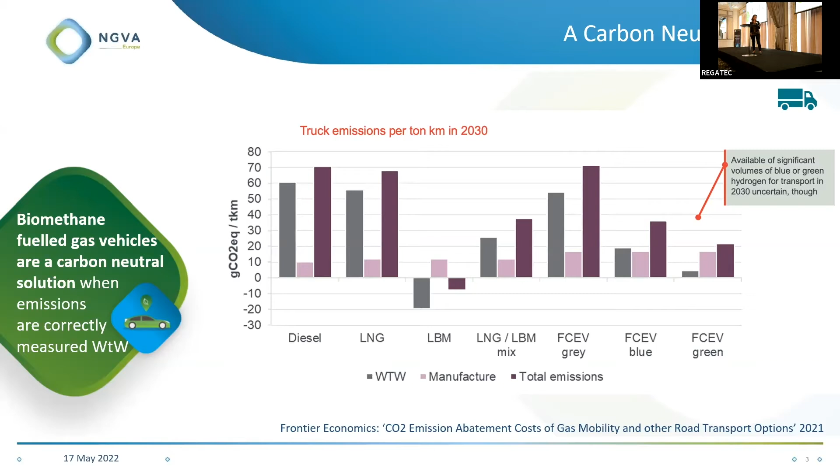And first, I don't need to tell you why we are talking about biomethane mobility. You know that very well. The advantage is clearly that biomethane is a carbon neutral solution for the transport sector. And we know how difficult it is to decarbonize the transport sector. It's a particularly attractive solution, especially for trucks, for heavy duty vehicles that are quite difficult to decarbonize. And even more, biomethane can be carbon negative depending on the feedstock sources. So that's why we're interested in this solution.

And we heard about biomethane availability and scalability today, but looking at the transport sector specifically, what does that mean? This is based on analysis done by NGVA Europe together with the European Biogas Association. And what is interesting is that if we look at 2030, the projection is that 40% of the gas used by gas vehicles, so in the transport sector, will be biomethane. This represents just 117 terawatt hours, which is actually less than 10% of the total EU production capacity.

So it just shows that using biomethane in transport will not use all the biomethane available for the different sectors, but still can make a significant contribution and complement other solutions to decarbonize mobility.

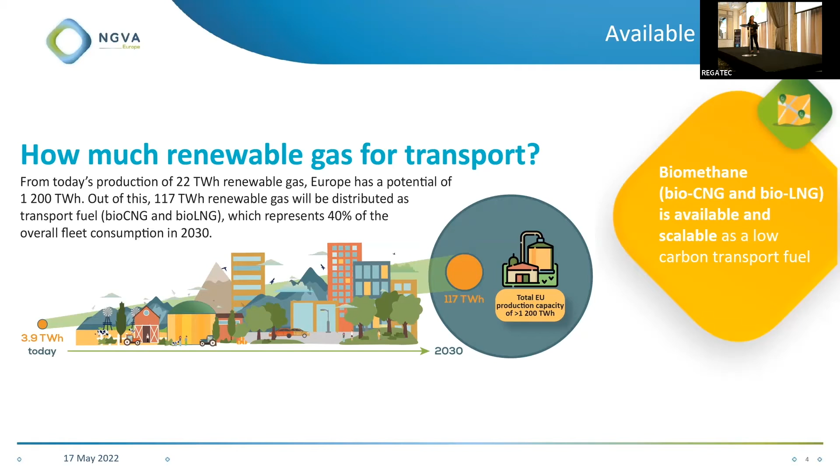What's the situation today with biomethane availability? This shows the share of biomethane at CNG stations in Europe today. And we heard already that Scandinavia is really leading the game on this, with almost 100% biomethane already in Denmark, Sweden, but also the UK and the Netherlands are not far behind. And also some countries at around 60%, Norway, Germany, and quickly increasing. So in Europe overall, that's 25% already, so significant and growing. And we see that there is a lot of potential to grow more.

So of course, domestically produced fuel and domestically produced vehicles also, especially when comparing with battery electric vehicles and a lot of components and materials that come from other places.

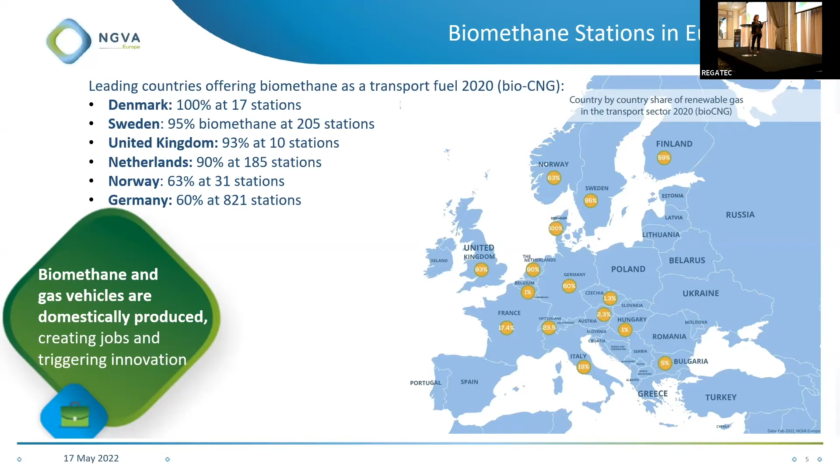When looking at LNG stations now, it's quite impressive actually, the growth of the fueling infrastructure in Europe. We are now almost at 550 LNG stations. It's like plus 10% every 2-3 months. Quite a good spread in a number of countries now, but still Central Europe, for example, is just starting. So in some countries, there is now pretty good infrastructure. In other countries, it's really just starting to ramp up, but still quite interesting. And we heard about some bio-LNG becoming available, even though it's not as much as for CNG stations, but still it's also coming, and that's very good.

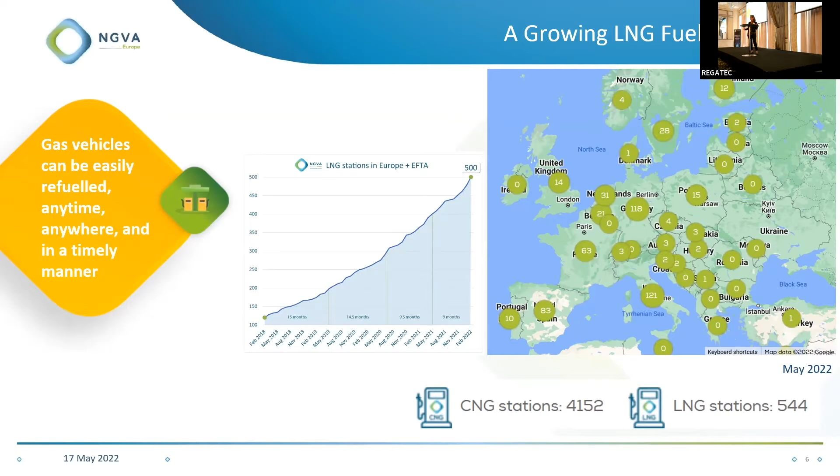Then vehicles, and the market for vehicles is that now the growth is really driven by the truck sector. That's the gas, so CNG and LNG vehicle registrations in 2021. And really, it's quite interesting to see the demand for CNG and LNG trucks growing by 40% in 2021, and that has been growing constantly over the recent years. Some countries with really, really high numbers, France, Germany, Poland. So that's really interesting to see that the market is going for this solution.

And there are many large fleets now going for CNG and LNG trucks, but also going biomethane, bio-CNG, bio-LNG, because really that's the practical and affordable solution they have to switch to carbon neutrality for their transport operations. So good developments in the market.

Now let's talk a little bit about policy. And that's a bit more challenging in this respect. I will give you an overview about some key files that are on the agenda this year. And it's quite interesting to see that despite the growth in the market, the interest in the market, it's quite a fight on the policy front to have biomethane mobility recognized, because policymakers look at an ideal 2050 world where everything is electrified, so-called zero emission. So it's really hard to get recognition for biomethane mobility.

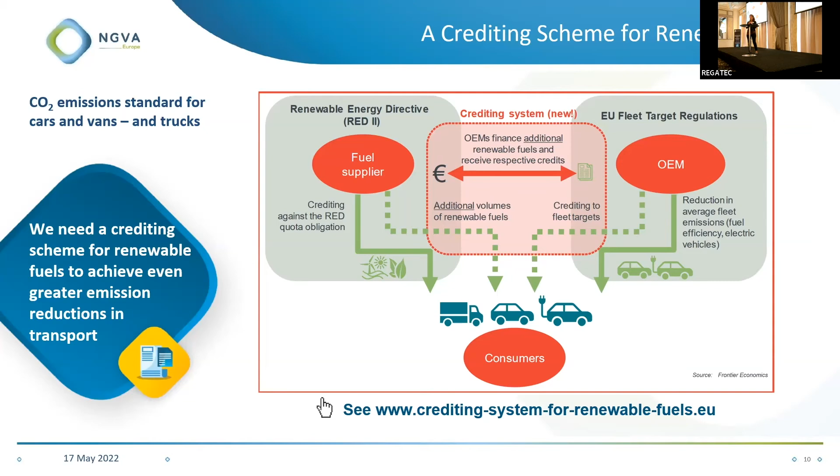Now, I take my Westport Fuel Systems hat and we'll talk a bit about hydrogen mobility and the synergies also with biomethane. Just one thing I want to mention, because that's not the topic, but there was a comment earlier about the share of hydrogen that can be used in natural gas vehicles.

Yes, there's a limit of 2% today in the regulation, but there are studies ongoing to assess the compatibility of the current vehicles with 10% hydrogen share. And so maybe actually all the fleet of CNG vehicles is already compatible with a 10% share. And then there's potential to grow higher. So as for blending hydrogen in the grid, there's that type of opportunity and it's being explored.

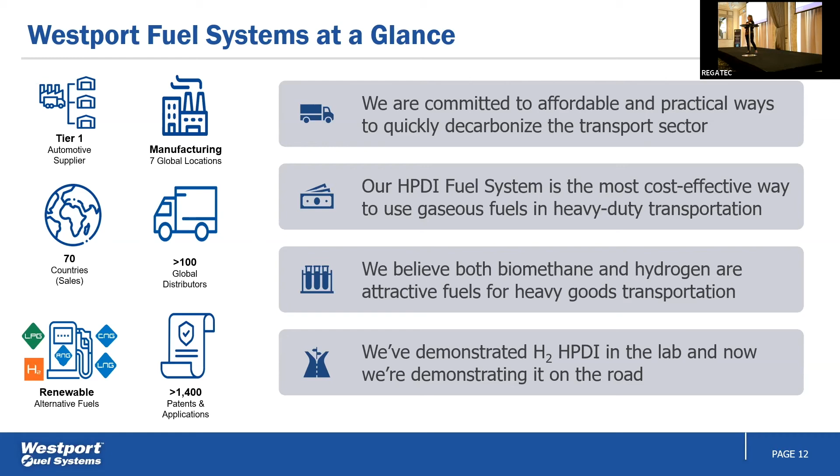But now I want to focus on heavy duty vehicles for this part, and talk about another solution. I will just tell you very quickly a few words about who we are. Westport Fuel Systems, we develop components and systems for vehicles. We are specialized in everything related to alternative fuels, to gaseous fuels. And so we work with vehicle manufacturers for the different types of vehicles. For the heavy duty sector, we are really looking for the most affordable and practical ways to decarbonize the transport sector.

And there's a piece of news I want to share with you today, and this is this truck. That's something we unveiled just last week, and that's what we call our first hydrogen HPDI truck. You don't need to know everything about what it is, but what is interesting for you probably is that it's a hydrogen truck, but without a fuel cell. And it's also kind of the brother of an LNG truck or bio-LNG truck. And this truck is already running, is being tested.

Without getting into the vehicle technology details, I just want to explain to you briefly why I'm saying it's the brother of the LNG truck. We have a fuel system that is commercialized in LNG trucks in Europe today. It's now deployed in thousands of units. And what we have done is we are applying the same technology, so many same components, the same engine architecture, but using hydrogen instead of LNG.

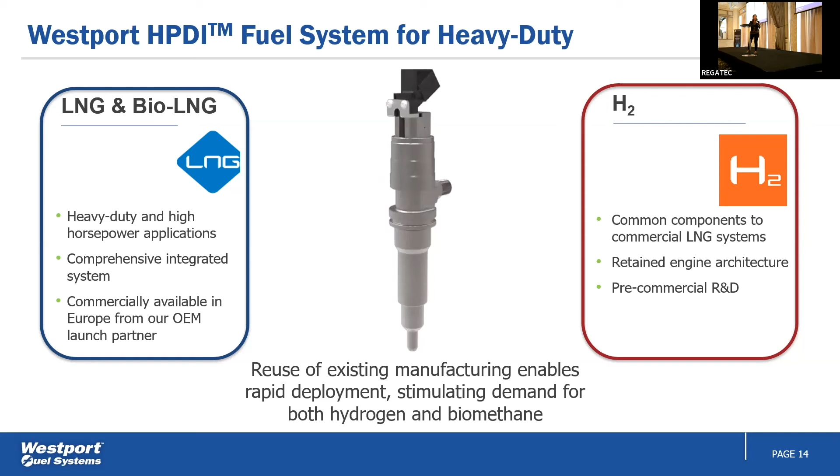In terms of performance, this is quite interesting as well, because when we compare with diesel, which is our base comparison, it's actually better performance in many respects when using hydrogen. More power, better efficiency, and of course, hydrogen is zero tailpipe CO2. Plus also advantages in terms of fuel quality, because you don't need as pure hydrogen as you would need for fuel cells.

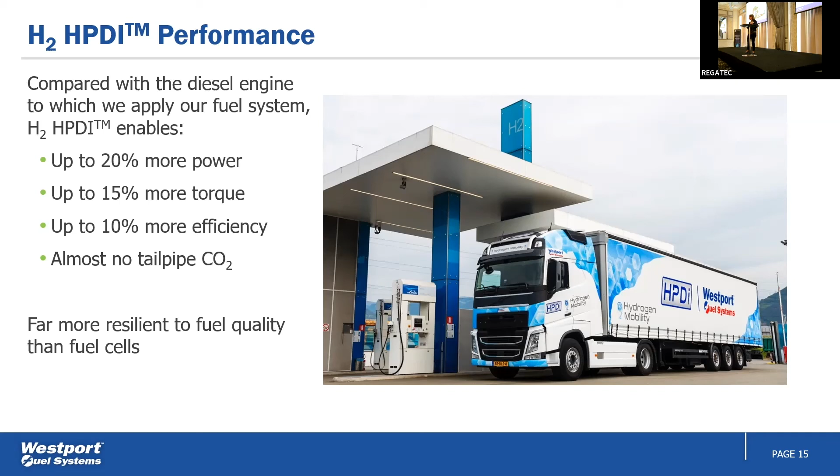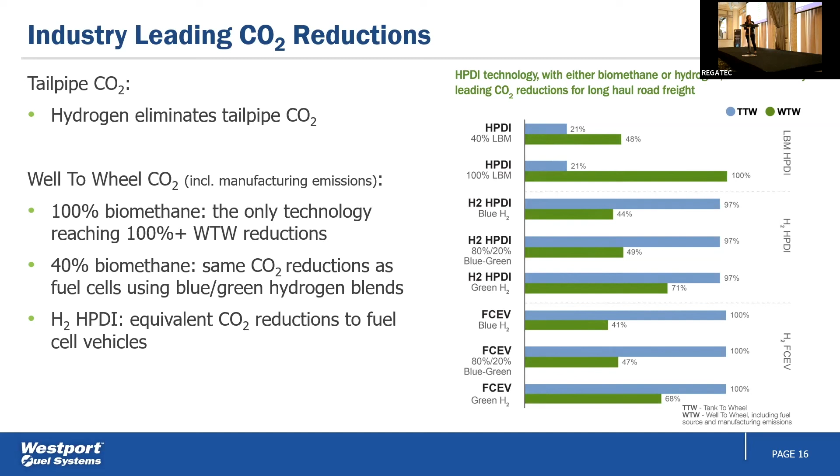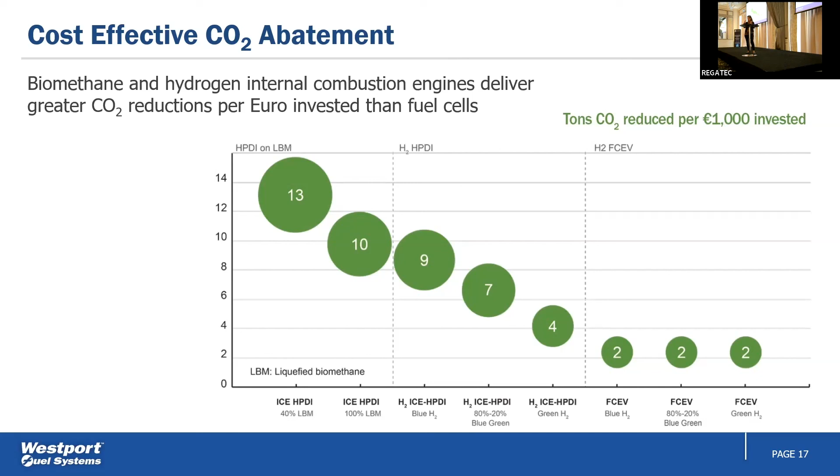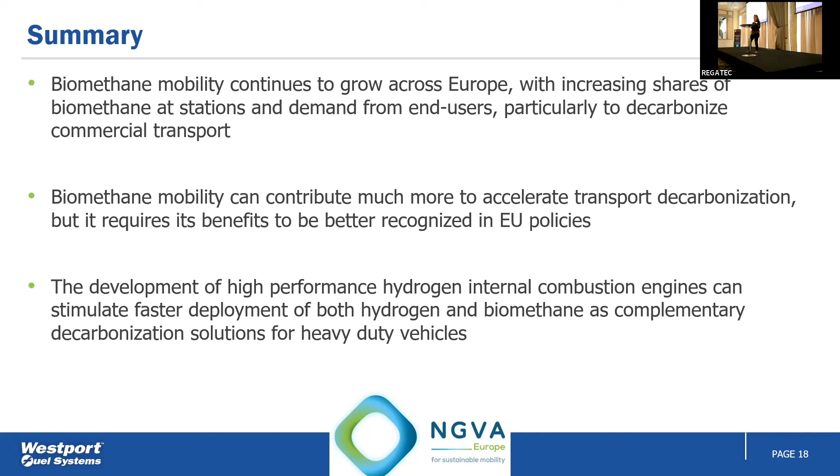Just to summarize the whole presentation, biomethane mobility continues to grow, with increasing demand and increasing interest, and there are opportunities for biomethane to really accelerate transport decarbonization, with the right policy signals, which is not entirely the case today. And on top of that, we think that the deployment of hydrogen internal combustion engines can complement pretty well and stimulate the market for both solutions.